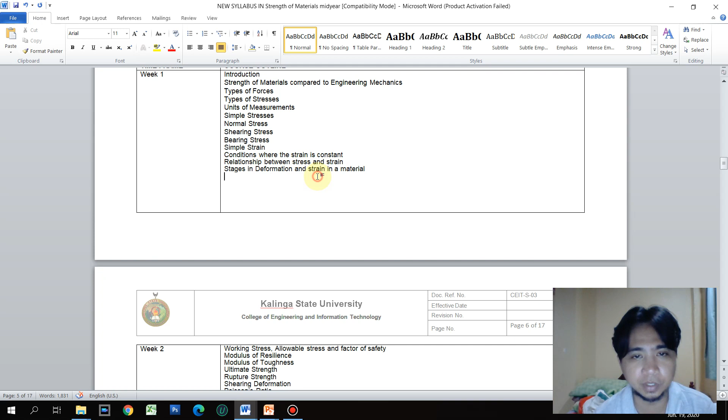So for the second week, we will discuss working stress, allowable stresses, factor of safety, the modulus of resilience, modulus of toughness, ultimate strength, rupture strength, shearing deformation, Poisson's ratio, biaxial deformation, triaxial deformation. So all of this refers to the chapter which discusses the simple strain.

On week 3, this is just an extension of the other topics from chapter 2. We have the bulk modulus of elasticity, modulus of volume expansion, indeterminate members, thermal stresses, torsional stress, the angle of twist, power transmitted by the shaft,

helical spring, springs in series and parallel, shear and moment diagrams, types of loading, shear diagram, moment diagram, methods of establishing the diagrams, and then we will learn how to write the shear and moment equations, relationship between load, shear, and moment, and then we proceed to the beam stresses, discussing the flexure formula, section modulus, economic sections, horizontal shearing stress, shear flow.

So these are the most important topics in strength of materials that are essential in your design subjects later on, like reinforced concrete, steel and timber design, and other structural design that we need to know. Okay, so for the introduction, may I flash to you a series of slides as an introduction for our subject.

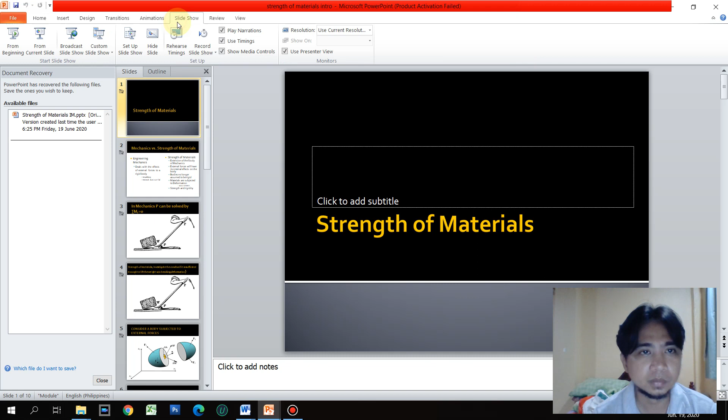So, of course, the title of this subject is Mechanics of Materials. This is actually the old title, Strength of Materials. Okay, so let us first understand the difference between your mechanics and strength of materials. By the way, your mechanics is actually the statics and dynamics that is a prerequisite for this subject.

So, engineering mechanics deals with the effects of external forces on a rigid body. We presume or we assume that the body is unyielding, the material does not fail. So, if we recall the concepts in engineering mechanics, we are more on determining the forces or the force reactions, whether this force is accelerating the body or not.

But in engineering mechanics, we have to satisfy the axioms of mechanics wherein the body should always be in equilibrium. So we apply the three equilibrium equations: summation of vertical forces, summation of horizontal forces, and the rotation, summation of moments, so the force times distance about a certain point.

So our concern is more on the force only, but we do not investigate the effects of these external forces on a rigid body, because as we all know, there's no such thing as an unyielding body or unyielding material. So we extend our knowledge in strength of materials so that we investigate what the internal effects of these external forces will be on the body.

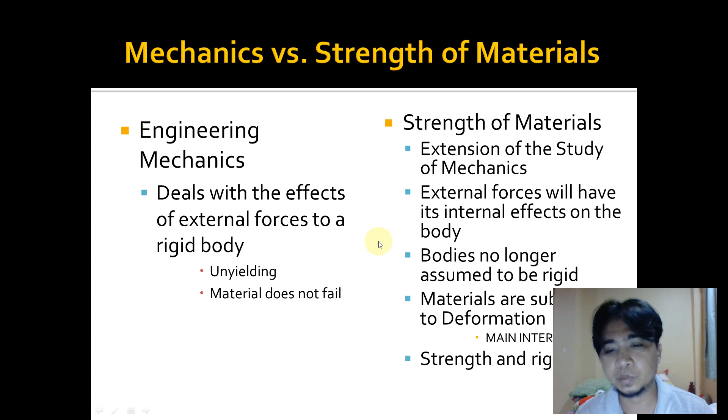Only that in engineering, we need to control this deformation so that it is a tolerable one, which is essential to a safe and resilient building or any structure related to engineering. So deformation is actually our main interest here, as well as strength and rigidity.

So in order to have a visual interpretation on the comparison between the two subject matter, let us consider here a setup wherein we will use a fulcrum bar to lift this weight. Okay, so why do we need to use a fulcrum bar? Because a fulcrum bar is a type of tool or equipment to reduce the force we need in order to lift this weight.

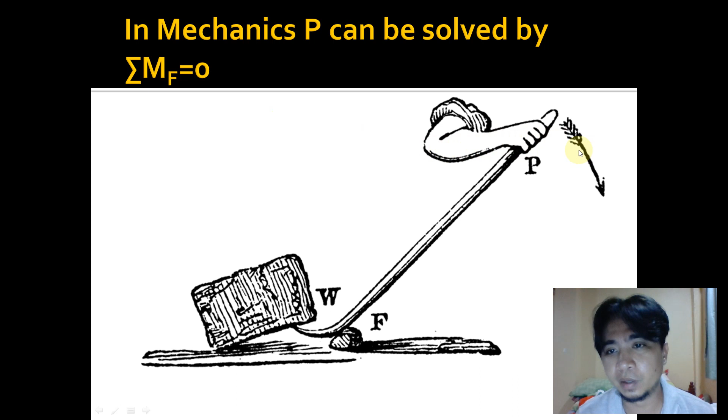Okay, so in mechanics, our point of interest is how much P is to be applied in order to lift this weight. Basically we can compute that by taking moments at F and equating it to 0. Why 0? Because 0 is an equilibrium condition, right? It is a balance condition. So once we exceed 0, it will begin to impend motion. So what is the P needed? That is our concern in mechanics.

In strength of materials, we are going to investigate whether this crowbar is sufficient enough to lift the weight without breaking, or whether this fulcrum bar will be subjected to a certain bending. Baka mamaya magbend, or it will have a buckling effect because the weight is too much. So that is our concern, the deformation. Or would this fulcrum bar break? That is our main concern in strength of materials.

So in short, the internal effects would have an implication on the strength of the material to be used. It may be that this material is steel. We have strength properties for steel, or if this fulcrum bar is timber, of course we have different strength properties for that material. So there are a variety of strength properties in different materials. So remember that. Hindi pare-parehas ang properties in terms of strength.

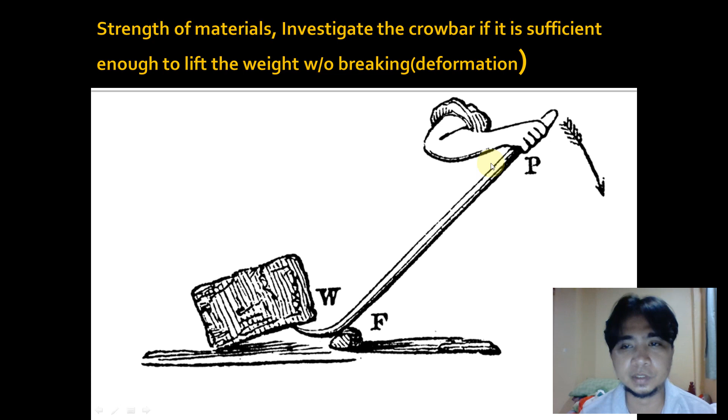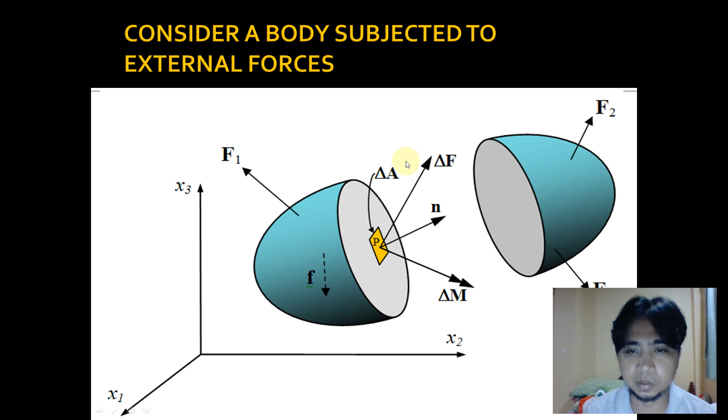Okay. So in strength of materials, we need to have an exploratory section wherein we cut the material and then investigate the effects of the external forces. Say we have F1, F2, F3, a series of forces; what are the effects of these external forces in this exploratory section of the member? Let us have an example. Say we have a parallelepiped with the X, Y and Z axes, and a scenario of different forces applied on those axes.

If we consider the X axis and apply a force parallel to the member, that is what we call the normal force. The normal force will have a corresponding normal stress. What is normal stress all about? Kung parallel yan, it could either elongate or compress the structural member. If it elongates, we term that a tensile force, and if it is compressing or shortening the material, that is what we call compressive force.

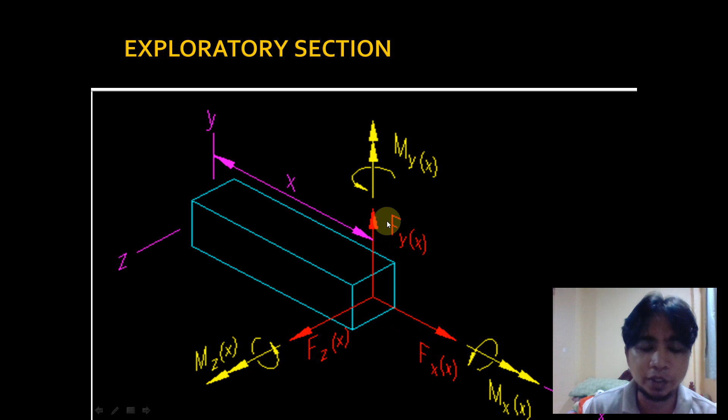downwards. So a while ago, this bending force or this couple would tend to bend this sideways. But if we have a couple in the z-axis, it will bend it upwards or downwards. Just the same, that is bending. Okay? So the same effect on the y-axis and the z-axis. On the x-axis we have a twisting and a normal stress, which could either be tension or compression.

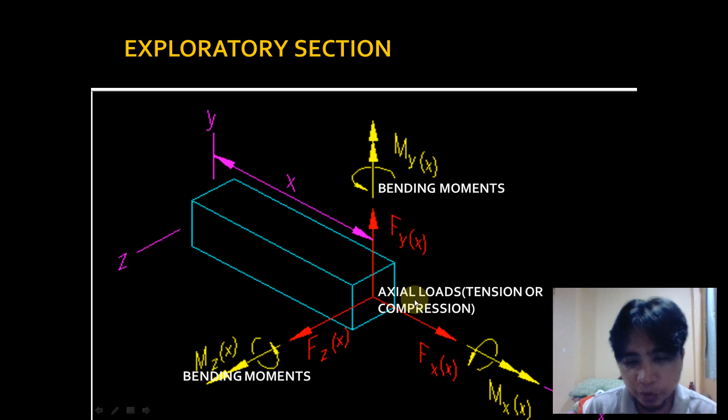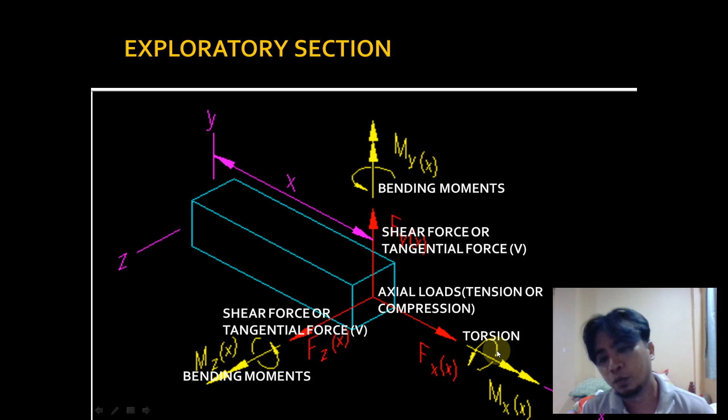So those are bending moments. We have axial loads or normal loads. Axial and normal is just the same term, tension or compression. Okay, so for the force, we have the shear or tangential force. Shear force or tangential force is denoted by capital letter V. And then we have the twisting. Okay, so this is just the same concept, only that we have a 2D presentation here. This is an exploratory section for the X and Y direction.

So as we can see, if it is parallel to the member, we have the axial force, and then we have here the bending moment. It will bend that downwards, of course. And then this one is a shear force. Again, shear force is not always perpendicular. It could be diagonal. If the shear force is diagonal, we will just get the component of the parallel force, or what we call the tangential force. So basically, we need to recall our knowledge in force components.

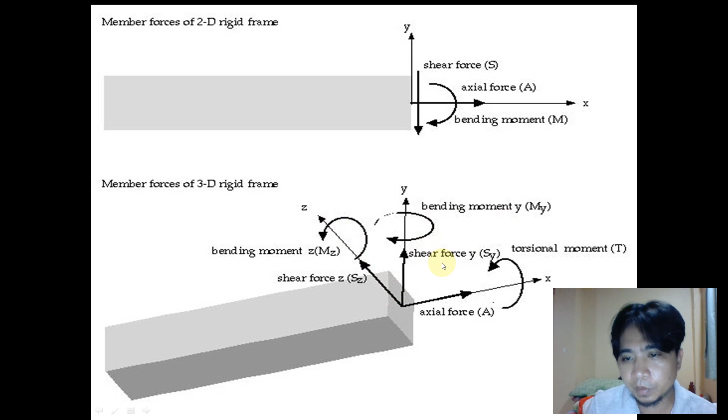Okay, so in 3D, just the same, we will have the bending moment, shear force, torsional moment, axial force, shear force, bending moment along Z or MZ. So for those forces, there are corresponding stresses. We have tensional stress here, and then we have the compressional stress. As we all know, tensional stress would tend to elongate the member, compressional stress would tend to shorten the member, and shear stress would tend to cut or slice the member.

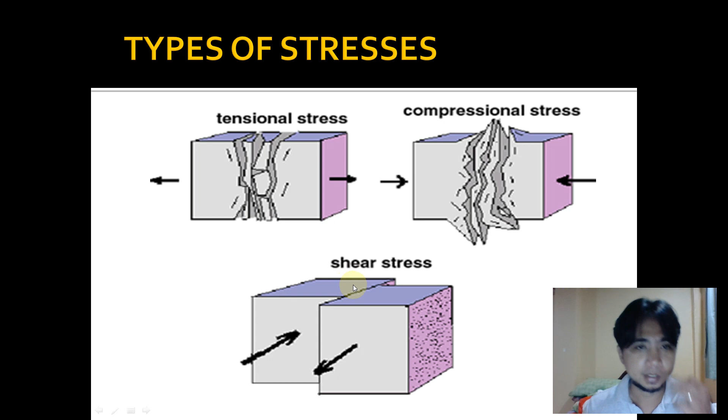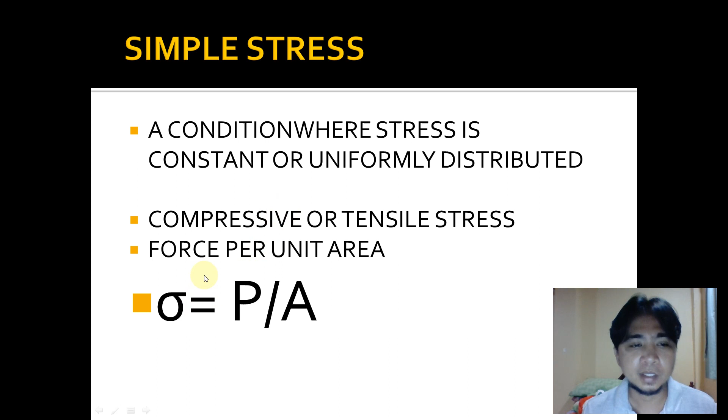Okay, so simple stress is a condition where stress is constant or uniformly distributed. Simple stress or normal stress could either be compressive or tensile stress. So simple stresses are axial stress, which could be tensile or compressive, and another example is the shear stress, and the other one is the bearing stress. The general formula is sigma is equal to the force over the area.

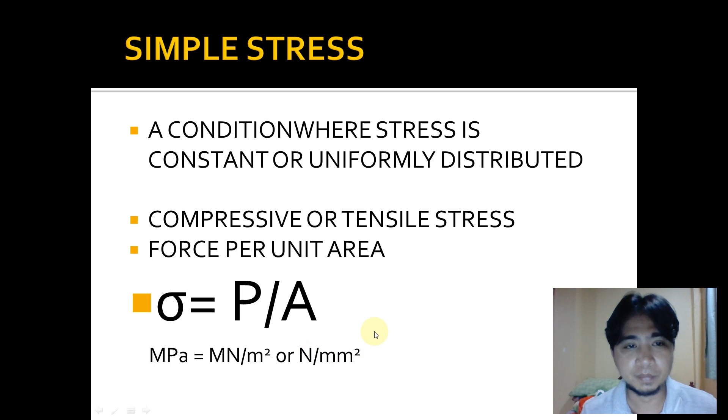As for our unit, we will stick to the SI unit. We have megapascals. A megapascal could be meganewton per square meter, or newton per millimeter squared. What is important in using this simple formula, that's why it's called simple, is do not make it complicated; it's just P over A. And just use a consistent unit. When we express P in meganewtons, we pair it with square meters. If we use newtons, we pair it with millimeters squared.

Okay? So that's it. Let me flash here a short video clip I have downloaded for you to have a brief review of those concepts. Okay?